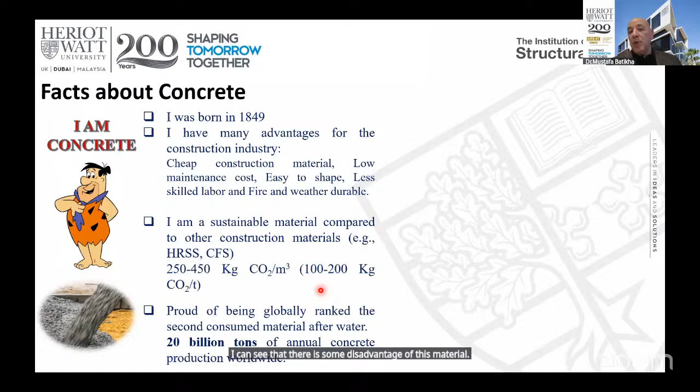And concrete is proud to rank globally as the second consumed material after water, and its production these days reaches 20 billion tons per year. However, with all these advantages, there are some disadvantages of this material. The first disadvantage is the cement problem. Because concrete depends so much on cement, and cement is a producer of CO2 emission, the production of cement can produce up to 1,000 kg CO2 per ton.

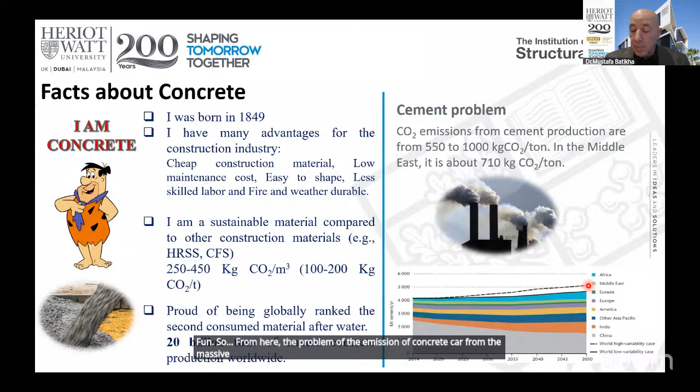If you look at this figure, I'm not happy to say that by 2050, the production of cement may reach 5 billion tons. So from here, the problem of the emission of concrete actually comes from the massive production of cement.

Let's talk about the UAE here. If we look at this graph, which gives the CO2 emission per capita, you can see that the UAE comes first as the country producing the highest CO2 emission per capita. Why? Because the UAE is a producer of cement and exports cement in the area. For example, per year, the production of cement in the UAE reached like 40 million tons. And because of that, the UAE is now number one in CO2 emission per capita.

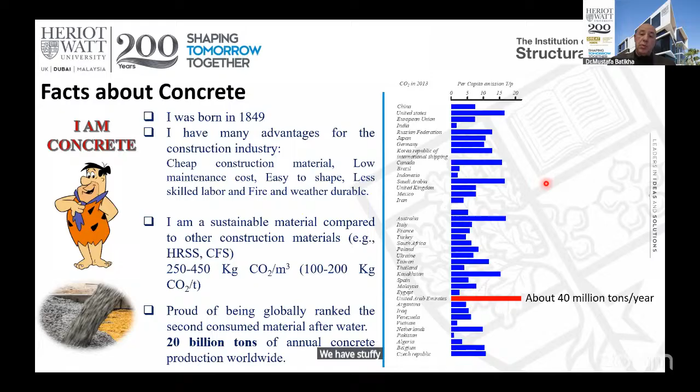Another problem of concrete is that our concrete is feeding on our natural aggregate. For example, in 2015, you can see that we required 48.3 billion tons of aggregate for concrete. And you know that the aggregate counts for about 75% of the concrete. This number is projected to increase 5.2% yearly.

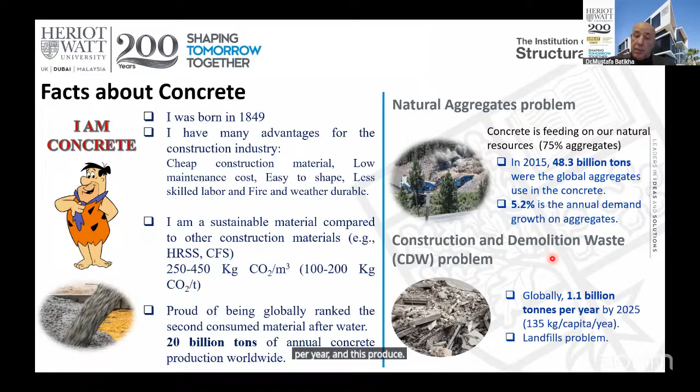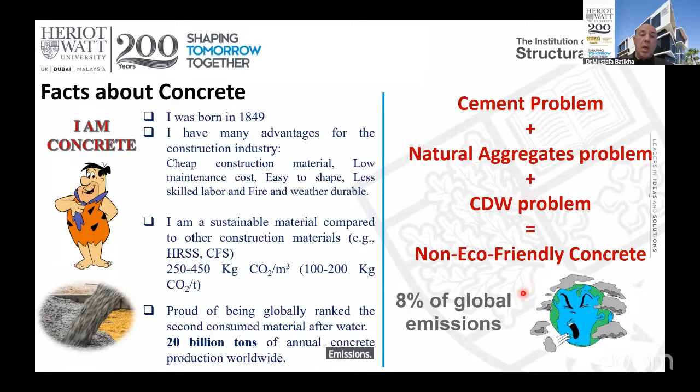The third problem of concrete is that it produces a lot of construction and demolition waste, which was estimated to be about 1.1 billion tons per year, and this produces landfills. So with these three problems I mentioned, we can classify concrete as non-eco-friendly. And let me tell you that concrete contributes to 8% of global emissions. So that was the disadvantage of concrete.

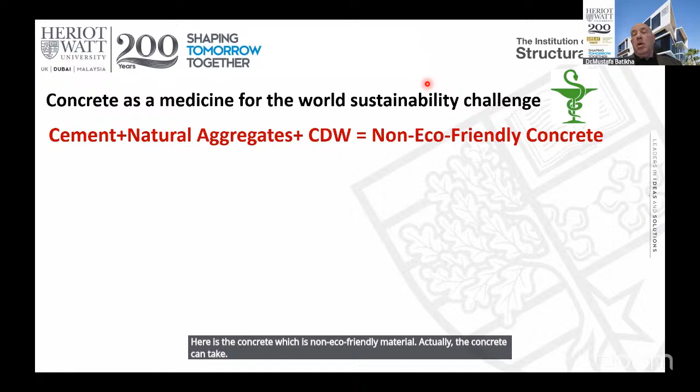But let me tell you something: we can turn concrete into a cure for our world's sustainability. How can we do that? Here is concrete, which is a non-eco-friendly material. Actually, concrete can take approximately all the waste on our planet. For example, we can take the cement and decarbonize it, and in some cases we can use industrial product waste instead of the cement. So that will be great.

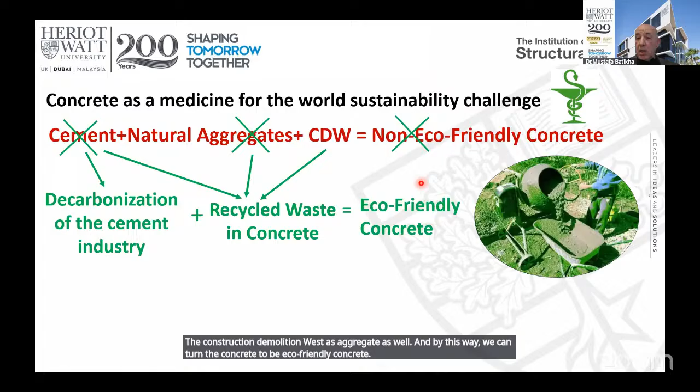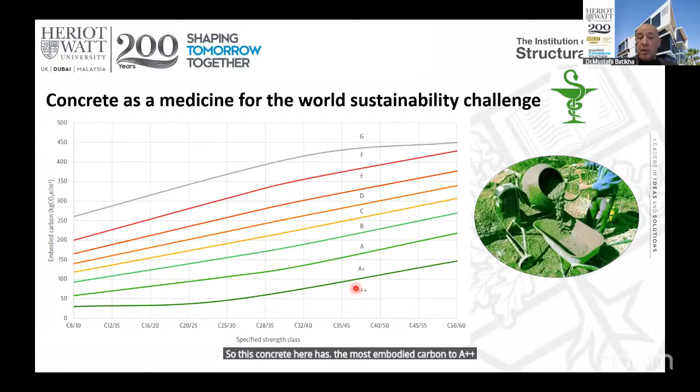And for the natural aggregate as well, we can reuse recycled waste, and at the same time we can use construction and demolition waste as aggregate. By this way, we can turn concrete into eco-friendly concrete. There is a rank for concrete, which comes from the IStructE booklet. It ranks concrete from class G, which has the most embodied carbon, to A++, which is the most green concrete.

So now there are many practices to create sustainable concrete. I'm offering 9 practices to turn concrete sustainable. The first 3 practices are simply to replace the cement with other materials, mostly industrial product waste. For example, we can produce a novel cement approach like geopolymer with zero cement, and I will talk in a minute about geopolymer concrete.

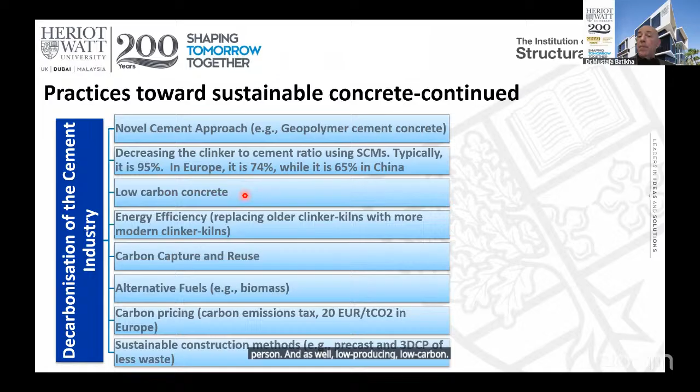Or we can decrease the clinker to cement ratio with supplementary cementitious material. For example, in Europe they are now replacing the clinker with 74% supplementary cementitious material, and in China they reached 65%. And as well, producing low carbon concrete. But with these 3 methods we have a challenge, because we have limited availability of industrial waste like GGBS, silica fume, fly ash, and I will talk later about ceramic waste.

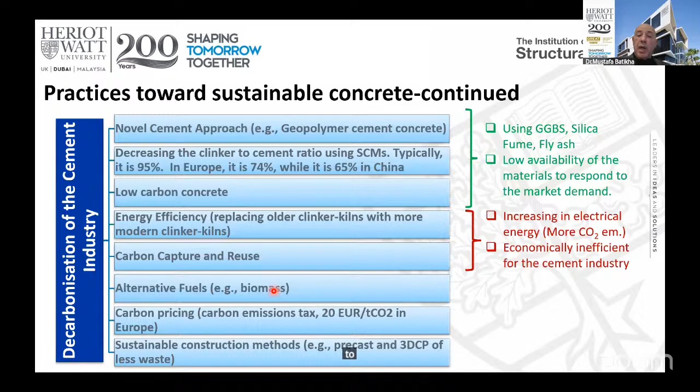We also have energy efficiency, like replacing old clinker kilns with more modern kilns, and carbon capture and reuse, which is the future, I believe. But these 2 methods cause an increase in electrical energy, and they found that up to now they are not economically efficient for the cement industry, so sometimes the market refuses to use them. We can use alternative fuels like biomass, but biomass is limited to specific regions, which brings cost inefficiency.

Some countries apply a tax; for example, in Europe they apply 20 euro per ton of CO2 emission for cement manufacturers. But this causes a high cost of cement production, because manufacturers add the value of this tax to their product. Another method is to use sustainable construction methods, like precast or 3D concrete printing, so you produce less waste. And optimization in design is so important to reduce the use of concrete.

In the future, maybe we will see the advantage of using the carbon capture and reuse method, because if you want to obtain zero CO2 emissions, you need to use this method. You capture the carbon and use it in other products, for example chemical products.

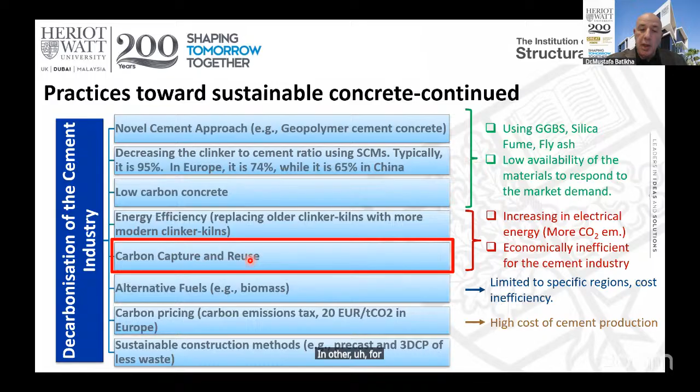As I said, the concrete can clean, let's say, the waste in our planet and reduce the landfill. But what is the recycled waste? Actually, the concrete can take, as I said, most of the recycled waste in our planet. I will explore some parts, and I worked personally on these parts.

For example, glass. The world produces a huge quantity of glass. In the USA, the production reached 12.3 million tons, and 8 million tons was landfilled. So 68% of this production was landfilled. The UAE produces less glass and less waste. Why? Because in most countries like the USA or Europe, they drink a lot of beer, not like the UAE. So from here the maximum production comes.

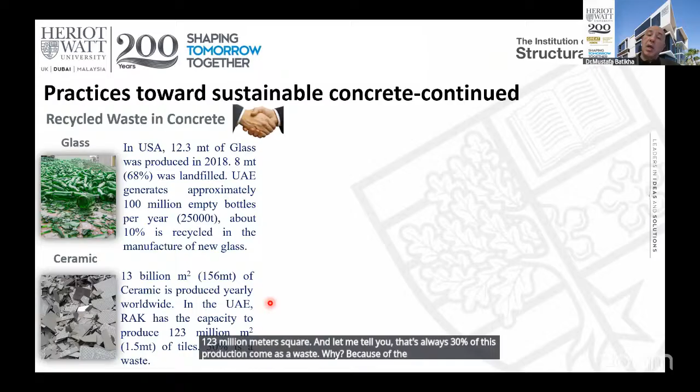We have ceramic. This is a very important material, and it has a lot of waste. For example, ceramic tile production globally reached 13 billion square meters. In the UAE alone, RAK company has the capacity to produce 123 million square meters. And let me tell you that always 30% of this production comes as waste. Why? Because of transportation and the manufacturing process. During the manufacturing process, you will have a lot of damage.

Ceramic waste powder is a very promising material to be used instead of cement, partially, absolutely partially, because you cannot replace the cement fully with this material. Do you know that each square meter of tiles produces 19 kilograms of ceramic waste powder? The ceramic waste powder is produced during the polishing process of the tile.

In the UAE, it's estimated that the quantity of this material reached 2.5 million tons, and this is very dangerous material. It's very fine material, and it can go to the ground, air and water. The concrete is the best product to take this material and save our planet from this dangerous chemical material. Ceramic demolition waste as well is a big issue all over the world, and we need to free our landfill, and concrete is the best product to take the ceramic demolition waste.

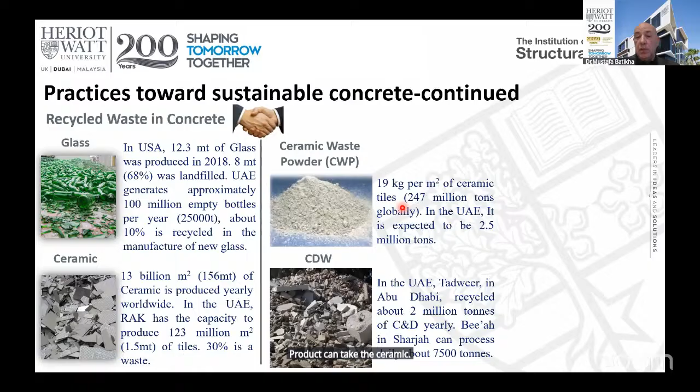Plastic, we all know the problem of plastic. The world produces about 380 million tons of plastic yearly. 80% is landfilled. The recycling of plastic, by the way, does not exceed about 17%. This way, we will reach 2050 with 12 billion tons of plastic waste in landfill. So concrete is the best product to take this waste.

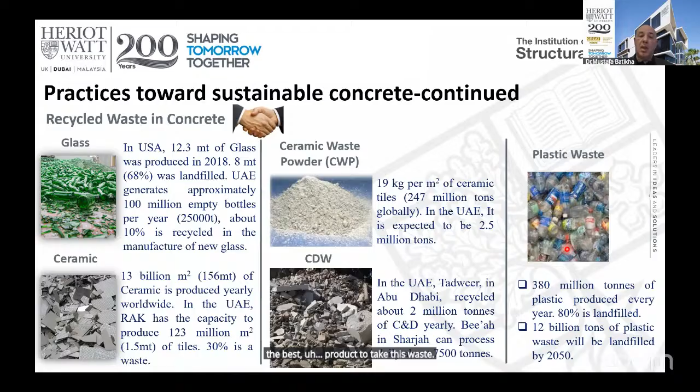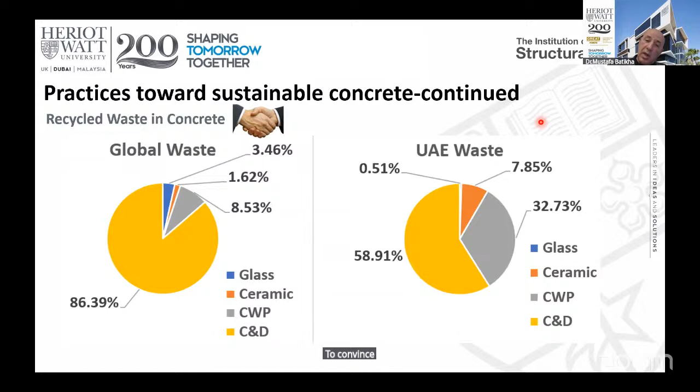But if we look at the UAE, construction and demolition waste comes first at 59%, and ceramic waste powder comes second at 33%. So it's preferable to use ceramic waste powder because it's a local product. You don't need to import other material from China or India, because this will add extra cost to your product. Our aim is to offer the market not just sustainability, but also cheap material, to convince the market to actually use this material.

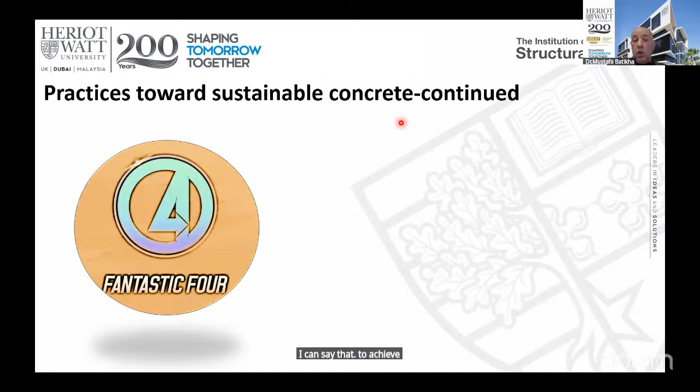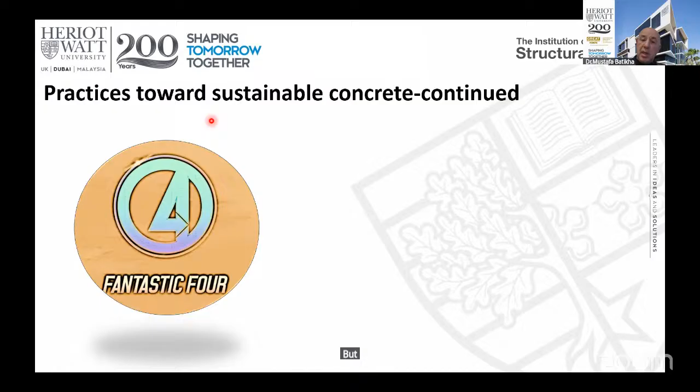To achieve sustainable concrete, you need to achieve the Fantastic Four. It's not the famous movie, but the Fantastic Four is: saving natural resources, reducing landfill, reducing CO2 emission, and confirming the low cost of this concrete. Then I can say that this concrete is a green concrete and an economic concrete as well.

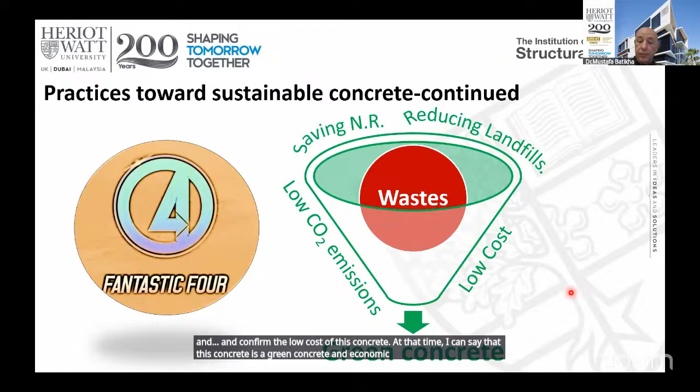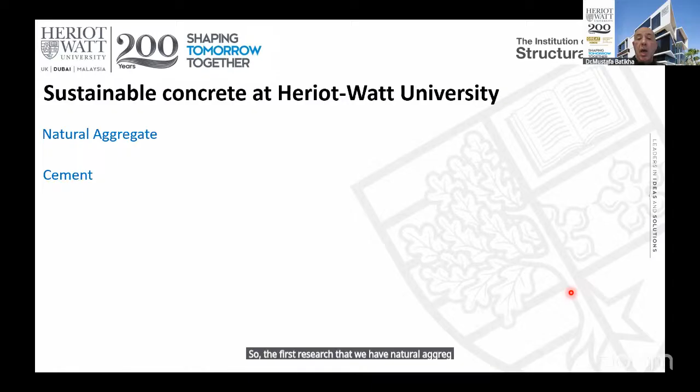I will take you now through some research conducted at Heriot-Watt University. In the first research, we have natural aggregate and cement, and we replace the natural aggregate by 100% recycled coarse material coming from construction and demolition waste. The recycled coarse aggregates we use here are produced by Bee'ah company in Sharjah.

As well, we take the fine natural aggregate and replace it with ceramic fine aggregate. We take the ceramic tile and crush it until we obtain fine aggregate from this ceramic tile. And in this project, we replace the cement partially by ceramic waste powder.

This work is published, by the way, here is the publication, and this work was funded by Expo Live 2020. And here is the result of this research. You can see that here we have 8 mixes, and here we are comparing the property of this product with the conventional concrete.

So as you see, in this final mix, we replace the coarse aggregate by 100% recycled aggregate, we replace the fine aggregate by 20% of the ceramic fine, and we replace the cement by 20% ceramic waste powder. The result was very promising. So you can see that we obtain high quality, by the way.

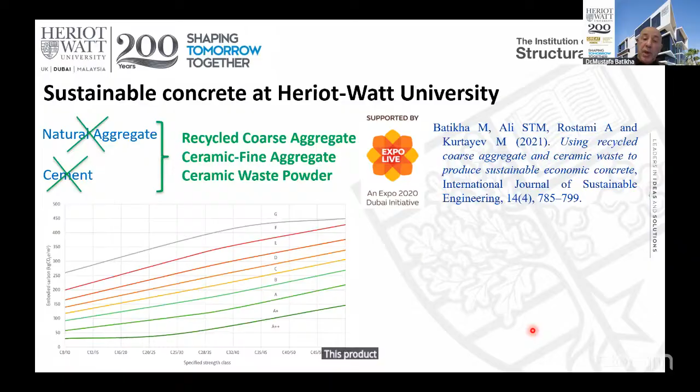This product, if we compare it with the rank of the ICE that I talked about, we can see that this product enhances the rank of the concrete from grade E to reach grade B, or rank B, according to the ICE ranking, while keeping the quality high and reducing the cost. So that was a very promising product.

You can read more about this product in this article. It's an open access article, so you can read more and read further about this research.

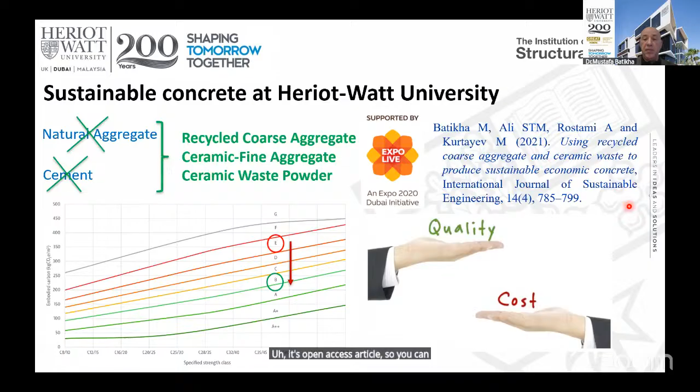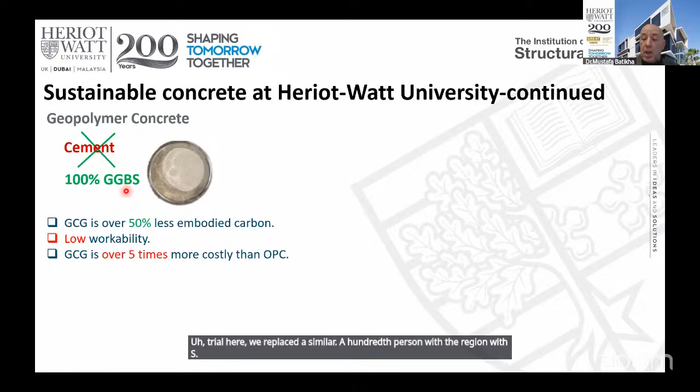As well, we work on the geopolymer concrete. In geopolymer concrete, in our trial here, we replace the cement 100% with the GGBS. So by this replacement, we were able to improve the rank of the cement from grade E based on ICE ranking to be A+. So you see the improvement here.

But actually, we face two problems here with the geopolymer concrete. First of all, the low workability. We designed this product to reach 40 megapascal actually, so because of that, it has low water quantity. And when we apply the superplasticizer here, the superplasticizer goes against the additives, because in geopolymer concrete we need to add activator.

We added two activators actually, sodium silicate and sodium hydroxide. The sodium silicate works against the superplasticizer and stops its work. Because of that, I can say that the geopolymer concrete can be used with low strengths, because in low strengths you use a water to cement ratio like 0.6, 0.5. But here in our mix, we use about 0.33, and the superplasticizer stopping working gives low workability.

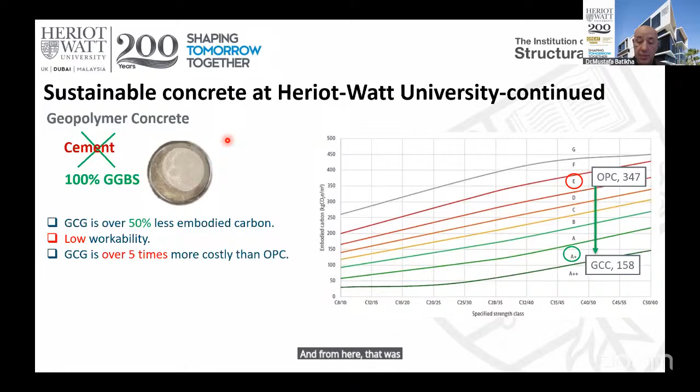Yeah, thank you, Dr. Mustafa. So I just will hand over now to Yara to continue from here.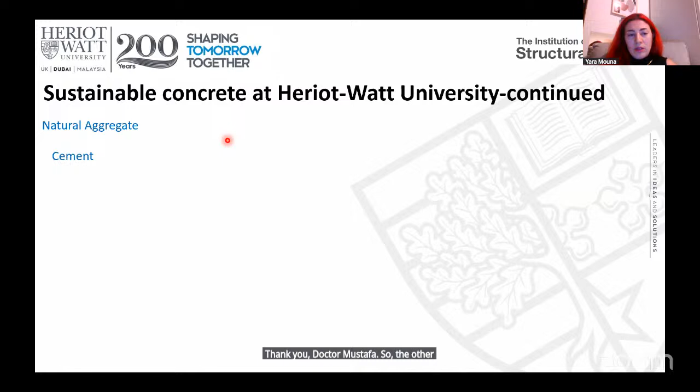Thank you, Dr. Mustafa. So the other research in terms of the sustainable concrete is the one that we did in 2021. It was part of my PhD. Another replacement was the full replacement of the natural coarse aggregate by the recycled coarse aggregate, locally generated from BIA company in the UAE. And for the cement, the replacement was 50% of GGBS and 10% of silica fume.

But this article was actually interesting because we didn't first have the decision of the full replacement of the recycled coarse aggregate. Before that, we did lots of literature review. If you can go next. So there was an extensive data analysis of the literature, and we collected the data. One of them reached 100 data points about the mechanical properties of the full replacement recycled aggregate concrete. We collected the mechanical properties as well as the durability from previous studies from 2007 until part of 2020.

So as you may see from the graph, according to the overall performance of the concrete, there's a spread of data, and this is an indication that the incorporation of a full replacement of recycled coarse aggregate would definitely deteriorate the overall performance in terms of mechanical and durability properties.

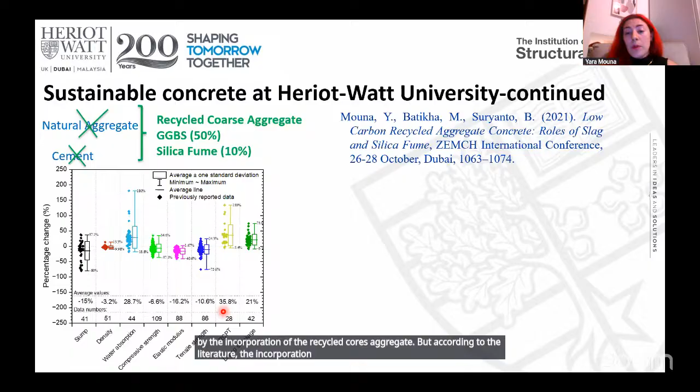But according to the literature, the incorporation of supplementary cementitious materials like GGBS and silica fume at their optimum percentage, replacing the cement, would definitely decrease or improve the quality of the recycled aggregate, as well as decreasing the embodied CO2 emission.

So according to the article we've done, this is the proposed concrete mix, and as you may see, although there was insignificant improvement for the mechanical properties, this might be attributed to the old ITZ that is adhered to the mortar of the recycled coarse aggregate.

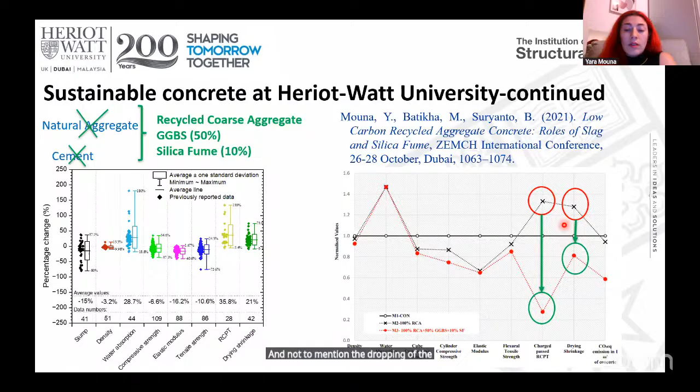But interestingly, there was a very good improvement in terms of the durability properties, like chloride ingress, which dropped about 80%, while dry shrinkage dropped about 35%. Not to mention the dropping of CO2 emissions, which compared to conventional concrete, dropped by about half.

So if you go to the next slide, according to the IStructE sustainability grades, this proposed concrete mix was able to decrease the grade, or the sustainability grade, of the concrete from being F, the worst material, all the way into the green part of it. This is the B level.

And this gives this mix good potential for doing further research, and this is what we've done.

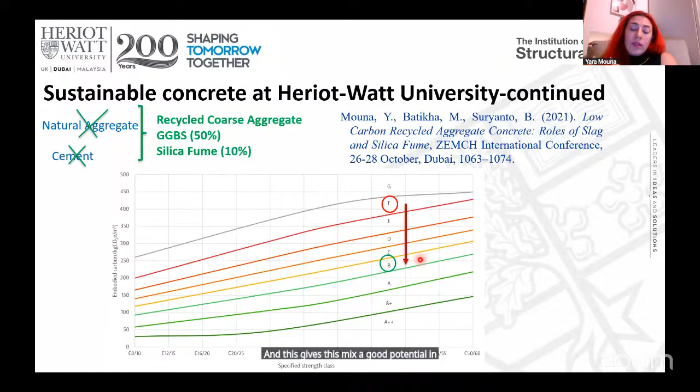So another research that we have done is the incorporation of fiber in concrete. We all know in general that incorporation of fibers in concrete may increase the tensile flexural strength as well as the fracture energy. But we focused on combining sustainability and good performance.

So we incorporated PET, which is plastic fibers coming from shredding water bottles, into the concrete. This article was done in 2024, and it was interesting because we found, if you can go please, next.

So we started by focusing on the optimum content of fiber in the concrete, which is the most challenging part, because this optimum can boost or maximize the benefits and performance of the concrete from incorporating the fibers.

So for this one we did a literature review, and then we found that the volume fraction of fiber in the concrete was not the dominant role for this, but rather a combination between the fiber geometry and the volume fraction.

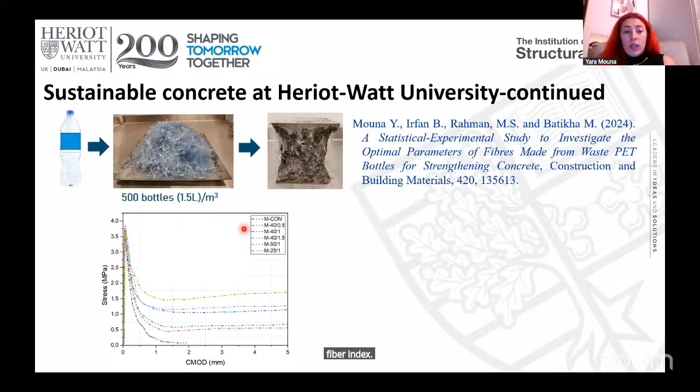So the combination of them gives us the optimum quality of the fibers, where according to many trials with different fiber geometry and volume fraction, we were able, by using the optimum fiber index, to increase the fracture energy to the maximum, reflected by the area under the stress-CMOD graph, which we can see here.

It's interesting to know that even for the durability properties, the use of the optimum fiber index, which is a combination of good geometry and shape as well as volume fraction, was able to decrease the dry shrinkage by up to 43%, which is interesting and gives potential to this kind of mix.

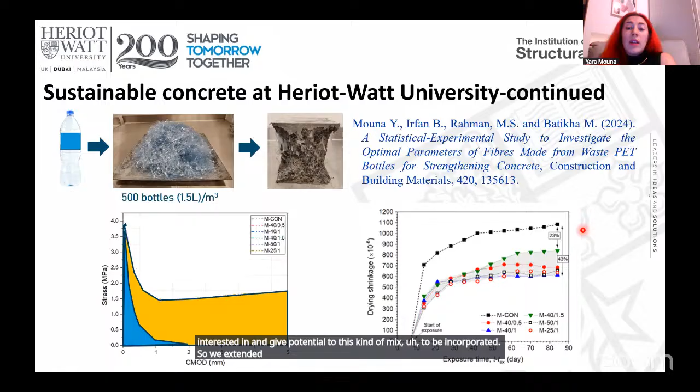So we extended the research, and we cast small shear-critical PET fiber reinforced concrete beams just to check the structural performance of this kind of mix.

And it's interesting that using the optimum fiber reinforcement in terms of geometry and volume fraction, we were able to lessen or reduce the brittleness of these failure modes, which are sudden, and to delay the crack pattern in terms of decreasing the sudden failure. This is so beneficial for saving lives.

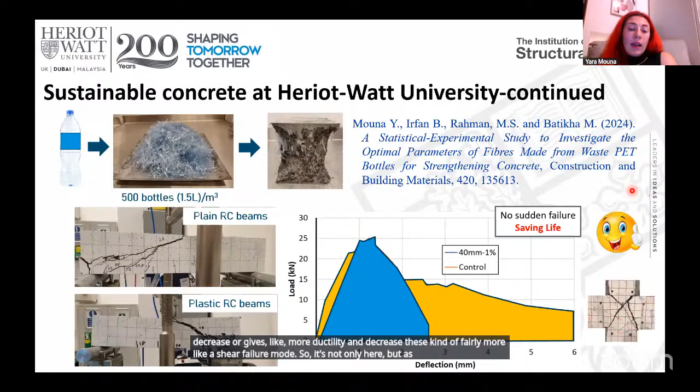By incorporating the fibers, we decrease or delay the crack pattern, giving more ductility and decreasing these kinds of failure modes, like shear failure mode. So it's not only here, but as well we have—can we go to the next please?

So the first one was incorporating the PET without any shear transverse reinforcement. But even if we incorporate it with the minimum shear reinforcement, so if we incorporate the PET fibers in beams where we have minimum shear reinforcement, the PET was able to even increase the capacity of these kinds of beams more than without adding any additional transverse reinforcement.

So increasing the capacity with the minimum shear reinforcement gives the closed loop of sustainability, because if we don't need additional or extra shear transverse reinforcement, we will be able to save some steel and reinforcement. So this is a beneficial loop of sustainability with the incorporation of the PET fibers.

We're still going further in this kind of research, because it gives potential for future research, and we're advancing and developing this research now, aiming to publish more, because these two mixes do really have potential in terms of concrete mechanical properties as well as structural performance.

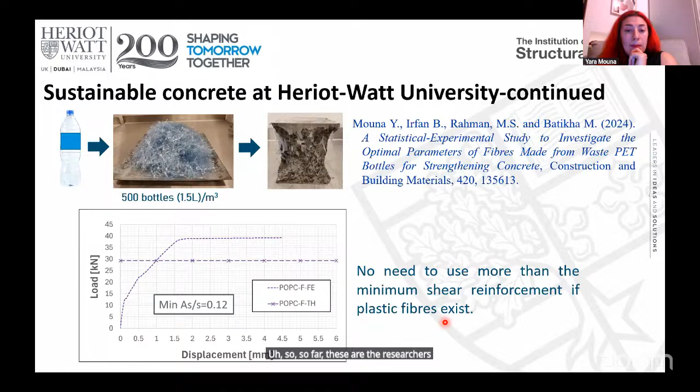So far, these are the researches, and these are the references for the research that we have done. Thank you so much for listening.